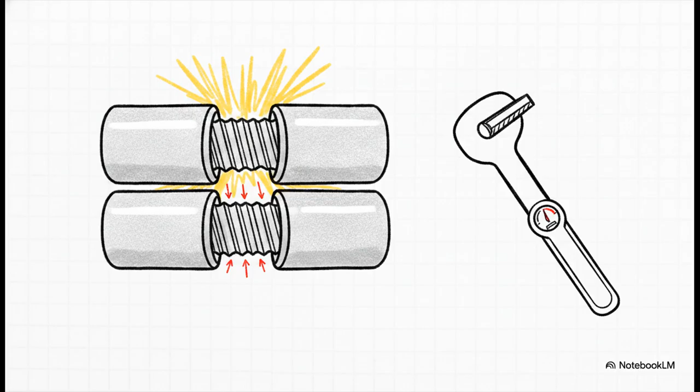Because of this, you absolutely have to pull the exact makeup torque from API tables, for example, roughly 25,000 to 30,000 foot-pounds for a 6 1/4 inch collar connection. You never guess, and you never ever do it just by feel. So what happens if you ignore those tables? Well, you invite in the silent killer of a drill string: under torque.

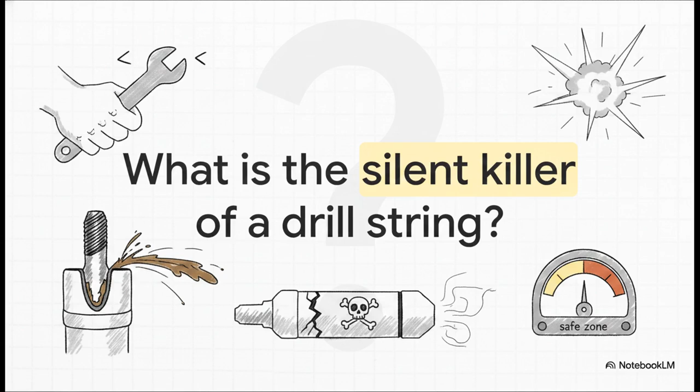If a connection is under torqued by feel, the shoulder doesn't seal properly. High-pressure mud jets through that tiny microscopic gap, and it will literally cut a channel through hardened steel in just a matter of hours. And this brilliantly illustrates why trusting the math matters so much. Diagnosing a pressure drop early is your only way to prevent the string from completely parting downhole.

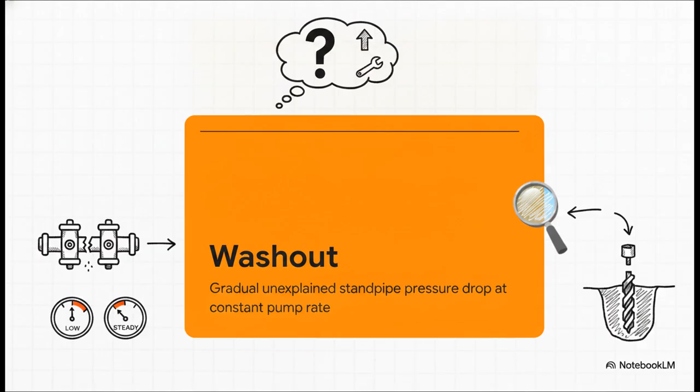If you see a gradual, unexplained standpipe pressure drop while keeping a constant pump rate, that is your drill string screaming at you, "Hey, I've got a leak." Catch this washout early, and you just replace one piece. Ignore the gauges, and that connection parts entirely, leaving your bit stranded at the bottom of the hole.

Section 2. Hoisting and brake physics. Okay, let's step over to the drawworks. We need to look at the exact physics that prevents 300,000 pounds of falling steel from just melting your equipment. The real danger here isn't lifting, it's lowering. We manage this using the capstan effect. The formula here is T2 = T1 × e^(μθ). It is arguably the most elegant piece of physics on the rig for brake bands and cat heads.

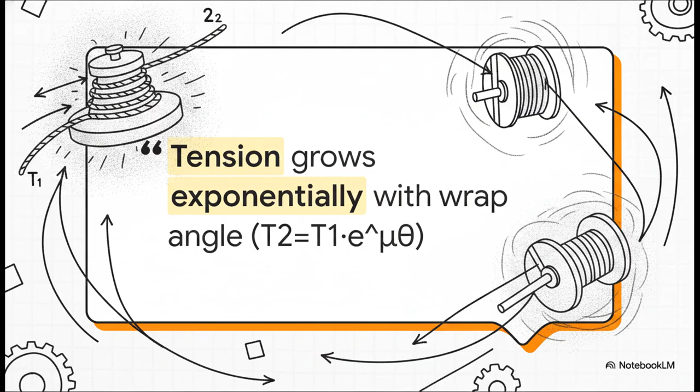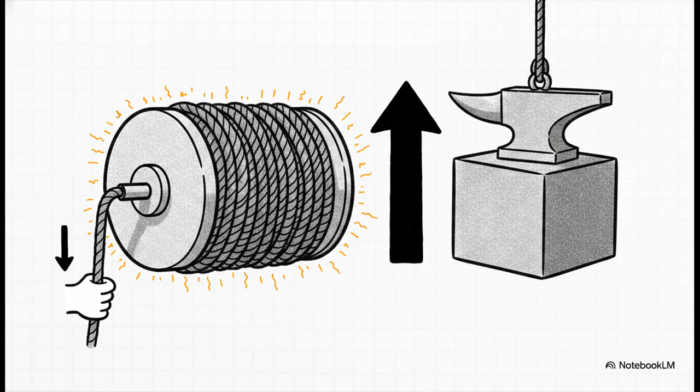What this equation is telling us is absolutely crucial. Friction adds tension continuously, which amplifies the driller's hand force exponentially around the drum. The tension doesn't just grow steadily along the wrap of the brake band, it multiplies. Thanks to this exponential growth, a driller pulling with just 100 pounds of force on one end can hold back literally thousands of pounds at the anchored end.

But we still have to manage the heat. Lowering just one 90-foot stand releases an astonishing 27 million foot-pounds of energy as heat into the brakes. Think about that for a second. To safely manage that massive thermal load, you have to follow the friction block rule. They must be replaced as a complete set.

Mixing old and new blocks gives you mixed thicknesses, which leads to partial contact. The heat concentrates on just a few blocks, and that causes brake fade, where the brakes silently lose their grip with absolutely zero warning at the lever.

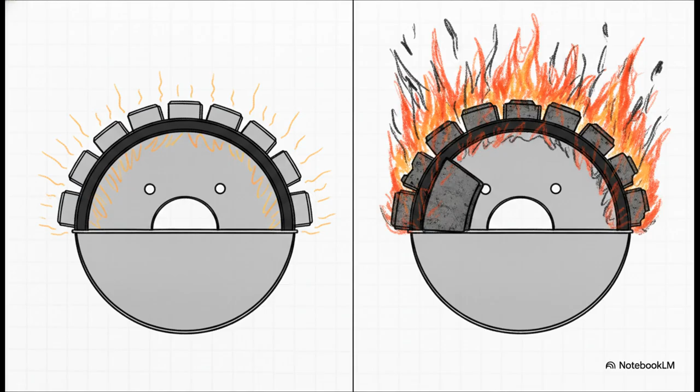And while we're on brakes, here's a vital safety contrast to lock in. Never, ever park a load on the auxiliary brake. It's fantastic for absorbing energy while a load is moving, but its braking force is entirely proportional to speed, meaning when the speed drops to zero, its holding power drops to zero. Only the friction brake can actually park and hold the load.

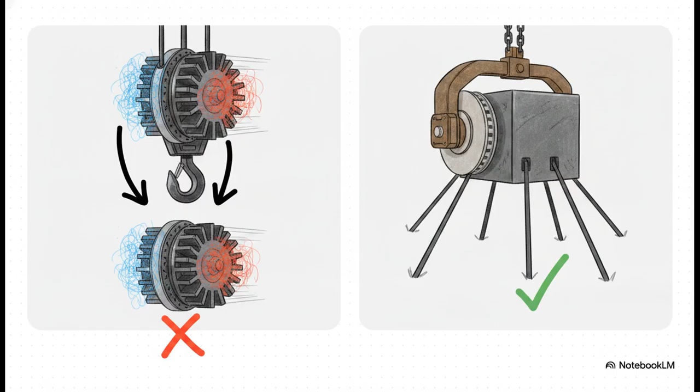Section 3. Pressure and well control. Stepping into the well control zone, managing extreme pressure is entirely about strict numerical compliance.

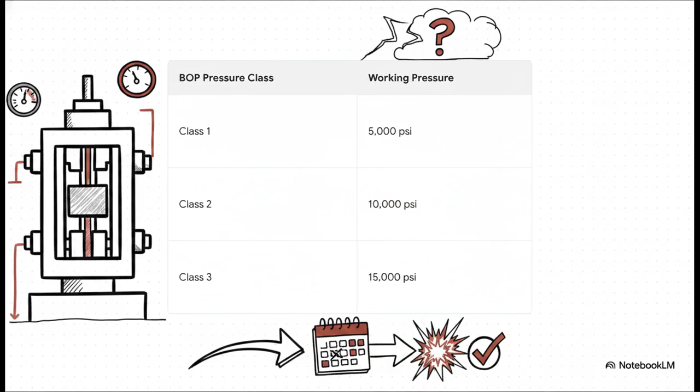Blowout preventers are selected based on exact working pressure classes, like 5,000, 10,000, or 15,000 psi. But keep in mind, an untested BOP is really just a dangerous assumption. Those ratings mean absolutely nothing if the equipment hasn't been proven. That's exactly where API 53 compliance comes in.

It dictates that the BOP test interval must never exceed 21 days. A BOP sits idle for weeks doing nothing until an emergency strikes. The only thing guaranteeing it'll work is the last time you tested it. Sticking strictly to this 21-day limit ensures this independent barrier is actually ready for a kick. And how do we test it?

You must always run the low-pressure test, typically 250 to 350 psi, before every high-pressure test. Now, this might seem kind of counterintuitive, right? But high pressure physically forces the rubber seals into a tighter fit. If you only test at, say, 10,000 psi, you might completely mask a flaw in the rubber that would cause a major leak at a lower pressure.

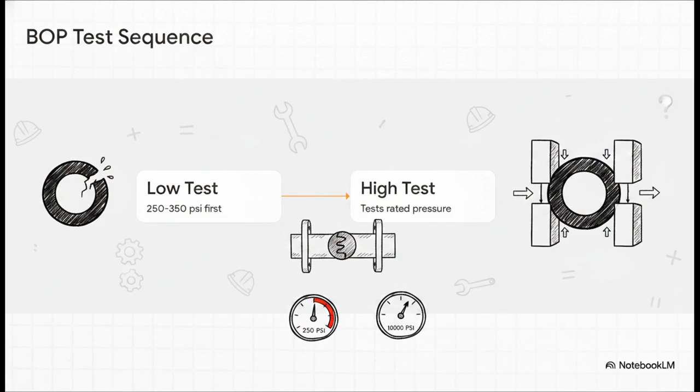Section 4. Casing and downhole plugs. Moving downhole, we look at the structural skeleton of the well, governed by burst, collapse, and tension design loads. A massive rule here. The casing head working pressure must match or exceed the BOP bolted to it. You never bolt a 10,000 psi BOP to a 5,000 psi casing head. The math explicitly forbids it.

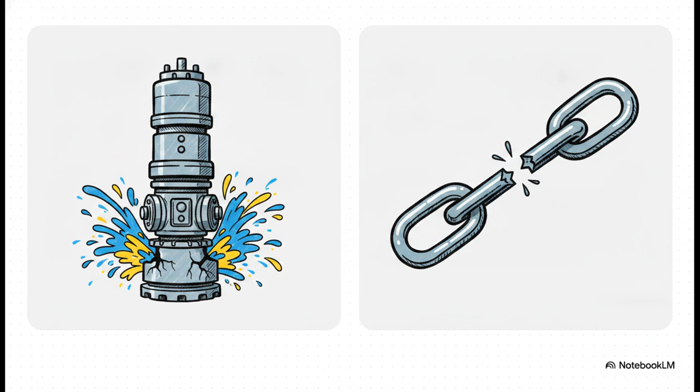Your well control stack is an assembly, and it is only as strong as its weakest flange. A massive BOP is entirely useless if the casing head beneath it blows out. Speaking of downhole isolation, bridge plugs typically have a differential pressure rating of 5,000 to 10,000 psi, but you must always check the direction of hold so the plug doesn't get pushed right off its seat.

Some plugs only hold pressure from one direction. You aren't just picking a depth, you're verifying that the exact specs align with the forces at play. And for every single slip set operation, remember this golden rule: the bowl taper must match the slip taper.

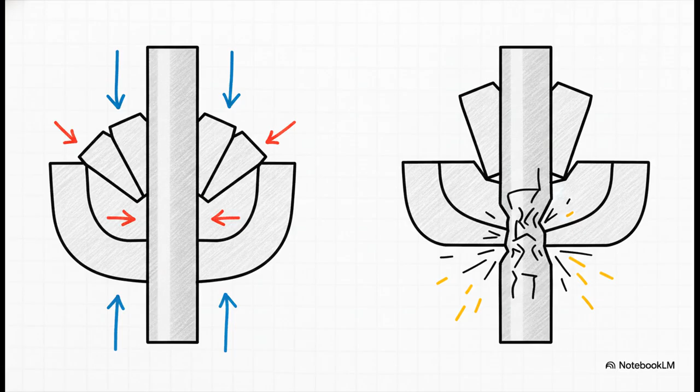This precise geometric match is what translates a string's downward weight into the inward radial grip that keeps it safely suspended. If those tapers are off, uneven wear will either crush the pipe or let millions of pounds of steel slide right through the rig floor. No way you want that.

Section 5. Mud math and hidden hazards. Finally, let's dive into mud math. Mud is a highly engineered fluid acting as your primary pressure barrier. When you're planning a kick response, literally one decimal point error in your barite formula can be the difference between a safe shift and a blowout.

The exact calculation is 1470 times the difference in weight, divided by 35 minus the target weight. So jumping from 12.0 to 12.5 pounds per gallon takes roughly 33 sacks of barite per 100 barrels. Balancing bottom hole pressure depends entirely on getting this math right.

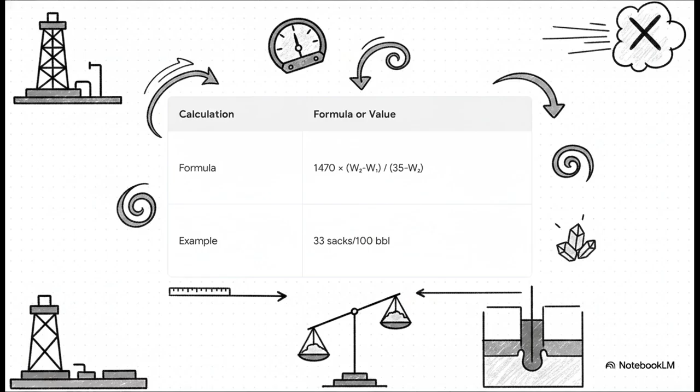But while you're mixing that mud, keep OSHA in mind. They limit respirable silica to just 50 micrograms per cubic meter over an 8-hour shift during bulk powder handling. Barite is essential, sure, but the silica dust it generates is a career-ending respiratory hazard. It has zero same-day symptoms, making strict numerical compliance with this 50 microgram limit absolutely crucial for your long-term health.

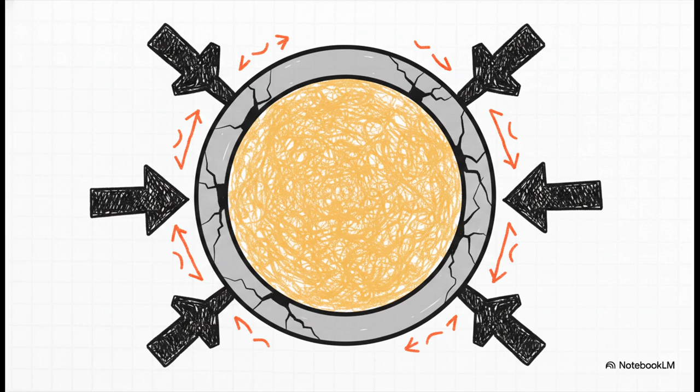Now, for a hazard hiding in plain sight: trapped annular pressure. Because liquids barely compress, a heated trapped liquid leads to a massive pressure rise. If fluid is trapped between casing strings and the well starts producing hot fluids, that liquid expands. With nowhere to go, the pressure skyrockets dramatically, threatening to burst or collapse your casing. A sealed annulus is definitely not automatically a safe annulus.

I'll leave you with this thought. In a world where forces are exponential and limits are absolute, knowing these key figures is your only true blueprint for survival. From the 27 million foot-pounds of energy on those brakes to the exact API makeup torque on a collar, success out here isn't about luck. It's about respecting the math. So ask yourself, are you trusting the numbers or are you just guessing?